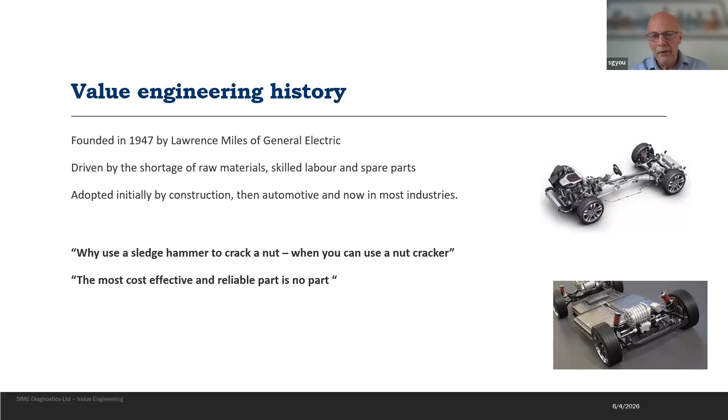It's a very simple assembly. It's very reliable. So this is where the value engineering comes into play.

So why do it in the first place? Most people focus on the cost aspect, your cost of goods and your life cycle cost. And do you know what? It's pretty good for that. If you want to knock out 50 to 80% of your product costs, start this value engineering at day one. I'll show you some examples where we've got significant cost out, but there's a lot more to value analysis and value engineering than just cost out.

So this one here, I was trying to change the exploration into something beginning with N, but I couldn't think of anything. And I could have had a nice instead of ice.

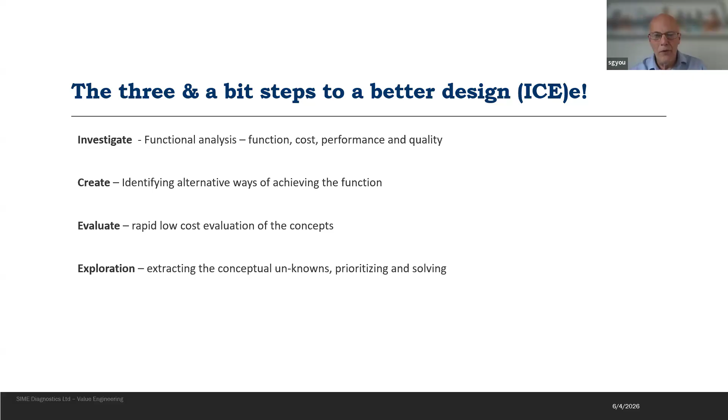Once we've gone through the functional requirements - let's talk about functional requirement - we're then in a stage where we can innovate brand new concepts based on function, not on what it currently does. A good example of that, if I jump forward a couple of slides...

If we look at a conventional way of setting requirements, we might say, right, we've got this mouse. It's the same as in cars - we've got this engine, we need more performance, we need better emissions. But that's almost driving a solution before you even get to the point of asking, what is it that you're trying to achieve?

What is the function that you're trying to achieve? You say, well, actually, in this particular case, what I'm looking for is on a screen, I need to move something or select something. Well, that opens up lots of opportunities. If you think about modern voice recognition, for example, or touch screens.

Let's go back to the voice recognition. If you can load in an app for voice recognition, effectively it is the license cost of that piece of software. There's no hardware anymore, so you can get rid of the hardware. There's nothing to go wrong in that respect. You can select things, you can move things around, and it's relatively no cost. So you've saved all of that unit cost.

A function map for a slightly more complex item - this is a costed function map that I've done in the past. This is for a water system on a radiotherapy machine. What's really interesting is this doesn't take more than a couple of hours, but the opportunity that comes out of this is significant. It tells you about the overall design from the perspective of the top level function.

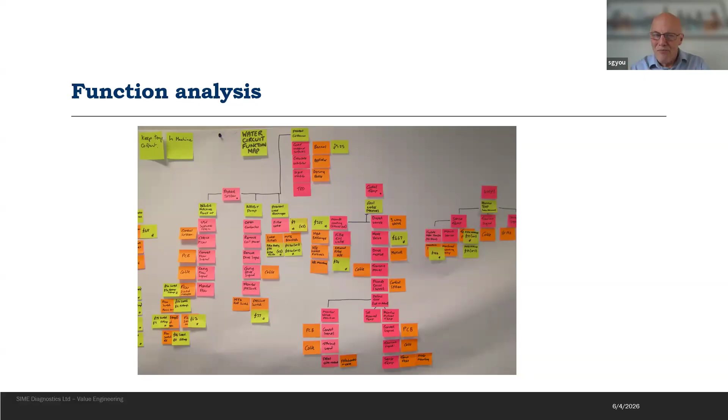And that is the key thing. It says it's control beamline temperature, but it had no mechanism of control. It was open loop, so that had failed. So you're paying all this money for something that didn't achieve its end result. That's really quite an interesting thing about it.

So from some of the examples, the first one is an IVD device, and they were really looking for some money coming out of it. The design house that had been working on it said it's very difficult, we've always considered cost down in our design, we're not going to get anything out of it. The reality is, once we'd gone through the methodology of value engineering and got back to function, the actual design team that had said it's not possible came up with a 26% cost reduction in that product from a one day event. That's significant, that's a massive amount of money in this. In this type of device you're looking at one that was around 60 to 70,000 coming down to around 40 in one day. I think that's good value for money in terms of investment in a tool or a methodology.

The second one is a radiotherapy machine and its water system. In that particular case, what it did was far more than the cost reduction. It got a 42% cost reduction because we had that target we had to achieve. But more than that, it achieved the primary function, and that meant other problems that system had seen for many, many years went away. The instability in the beam performance was affected by that activity.

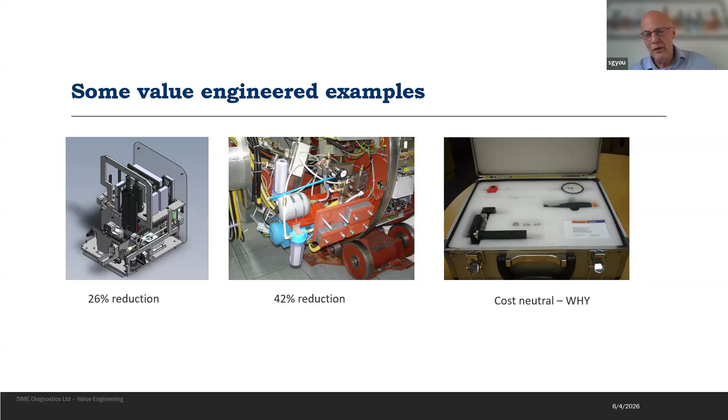So they haven't been painted into a corner. Typically requirements paint you into a corner, saying well this is how it currently works, and we're just going to refine it. It's a refinement. In that mouse example, it was all about, oh, make the mouse smoother, make it look nicer, but it's still a mouse, you're still going to end up with a mouse. Whereas if you go all the way back and say what is it the customer really values, you can change your whole perspective to something that will cost you nothing. So you can cost something or cost nothing.

If you're doing risk analysis, that's key in aerospace, medical devices, military - your DFMEA, PFMEA, and hazard analysis are all linked to loss of function. So it immediately eases that burden as well. Requirements capture becomes easier, the structuring of your systems level architecture becomes easier. So there's so much more to this tool than just getting some cost out. Don't get me wrong, it's great for doing that.

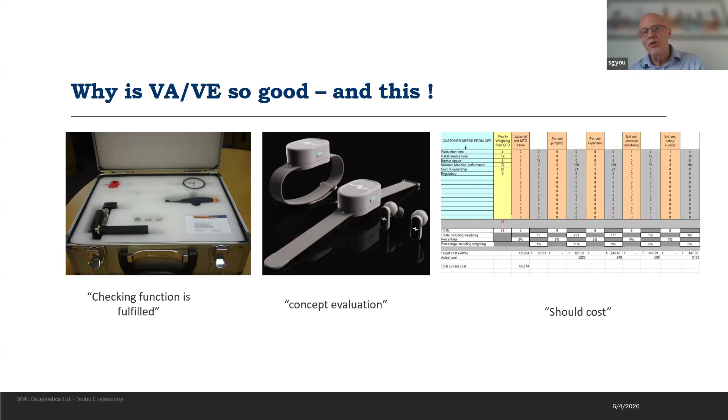Along with this whole tool set, you also have your low cost evaluation. It sits hand in hand with value engineering. So you test out your functional kit with low cost, and here we've got lots of cardboard examples, which again shows speed of development. Everything I've told you about today is very rapid - getting you to an endpoint is a very rapid thing.

This is why it sits in the lean product development folder nicely, because lean is about delivering something of high quality fast, not with more effort. I love this left-hand example - a whole luggage scanner made out of wood, a brilliant example of testing something before you go and commit to it. It was achieving a set function, and they made the rapid prototype to reflect their thoughts in delivering that function. If I could have done, I would have persuaded them to keep the wooden model.

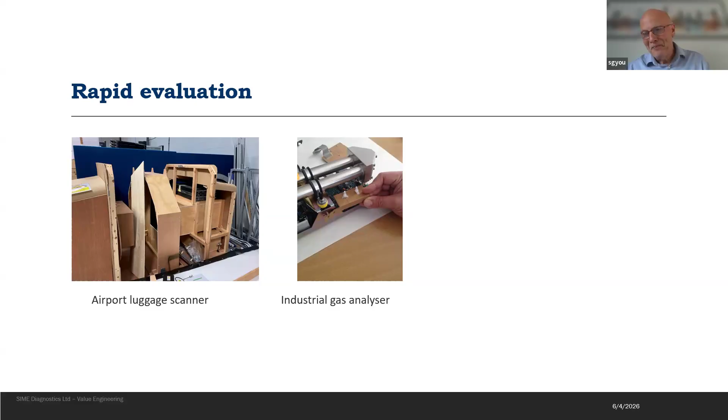I will jump back in a second to one of the slides that gives the methodology in a very simple way, but I want to go to my leaving thoughts before I jump back. I know it's a bit of a strange way of doing things, but that's kind of how I work.

The one thing I can honestly say is that in every company I've been in, from the point I was shown this, I've used functional analysis and value engineering, and I have never ever regretted it. So that's number one. And the companies I've used it with haven't regretted it either.

Focusing on this function changes the whole dynamics of the design. It reduces the level of risk that you carry. It enhances customer value - so there's another lean methodology ticked off. It significantly helps with risk management because you've already got the function map that rolls straight into your DFMEA, PFMEA, and hazard analysis, reducing your burden on other stuff you'd need to do. Fault finding and knowledge transfer becomes easy as well, because you've got a function map that describes how something works in very easy terms.

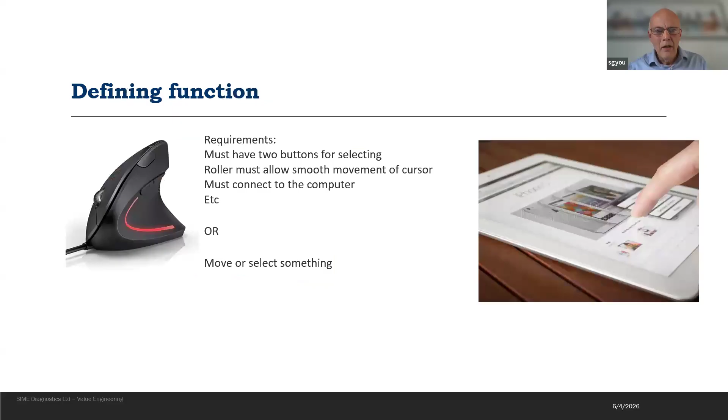So I'm going to jump back a couple of slides if that's okay, and then I'll take a few questions. The one I wanted to focus on is this one.

So I jumped all around and didn't really describe functional analysis in its core terminology. Really, it's talking about what the customer is willing to pay for. So if you were going out and saying, I want to buy a new watch, for example, what is it they're actually buying? Is it the watch, or is it the ability to tell time, or to look aesthetically pleasing?

That's kind of what and how you achieve that - it could actually be if it can tell the time, and it's a speaking watch, and it looks nice, I'm happy with that. So you don't need the display anymore, you don't need the fancy housing. For different users, it's different things, but it's bringing it back down to what is it that the customer's really asking, and it's not those detailed requirements.

So a function, if you look at this, it's broken down into a noun and a verb, and that can only be a maximum of four words, and that brings the teams together to really focus on what they really need, because someone could end up writing a requirement. So in this particular case, a primary function might be for a car to transport people.

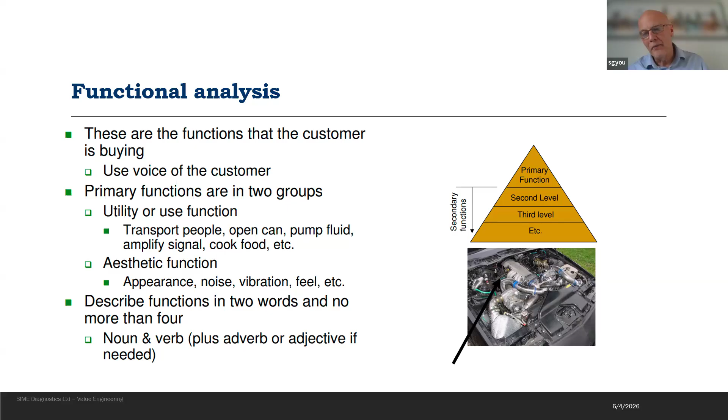And that's kind of where I wrap up, and that's why my end slide basically says: give it a go. What have you got to lose? So that's me, I'm open to any questions.

Colleen, I see your hand up straight away. Yeah, fantastic presentation. I have to say, the simple aesthetic of your presentation really translates into just how deeply you have gone into the subject matter, and have really removed a lot of the noise from your messaging. Standout presentation, thank you.

My question for you is, I'm a big advocate for quality function deployment and FMEA, which can often be so complex and intimidating. I'm wondering about another intimidating part of this, called TRIZ, and the technical contradiction that is sometimes used in these groups. I'm just wondering if you've had any involvement with that methodology and whether you've found it helpful or not. And I don't know how to lower my hand, so sorry.

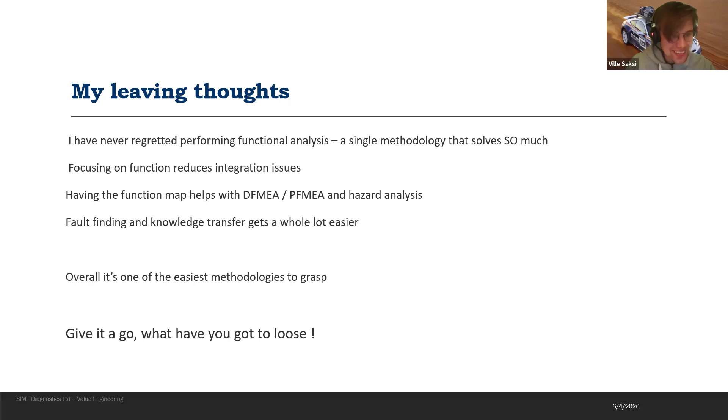But these sort of things, I think the books kind of describe all of this. I don't know if you've seen the Haynes manuals for cars, but I wrote the books based on the Haynes manuals. It will never make you an expert, but it will get you through, from departmental management right the way through to full business transformation.

So, is there any other questions, or should we move on? Oh yes. So how do you say your name? Steve. Oh, Steve, okay, I'm looking at your name on the thing. Sorry Steve, I came in late, so I apologize for that, I'm very sorry.

But I can relate to your functional breakdown. I used to facilitate building those for diapers, which are quite complex - personal care diapers for babies, fem care products, adult care products, and all sorts of things. But I had a question.

When you build them, how far down do you go? Because we used to go all the way down, from a system standpoint, all the way down to raw material and even down to centerline settings in the process. I was just curious, when you build those, do you ever go that far down, to component level? But it's interesting.

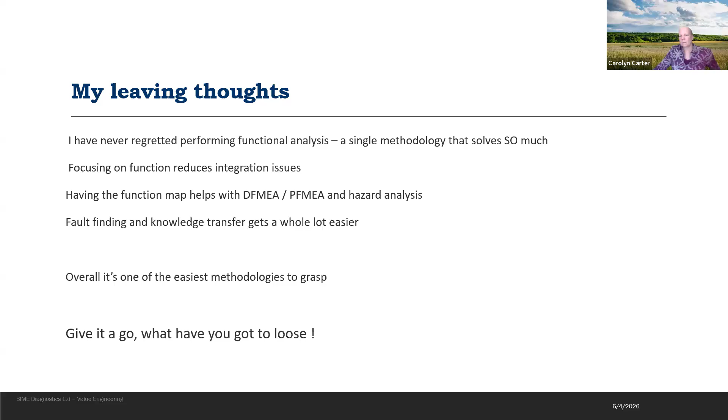A lot of your clients would want you to deliver something that's delivering the customer value in the simplest form at the best cost. What you could demonstrate to them is, here it is. And you can come up with something unexpected. That's the thing I love about it, is it changes the paradigm of engineering.

And it's one of those things, Nick, with yourselves and your great team, it's the sort of thing I would love to just come and do for nothing, give you the run through. It's just because it's that great. Yeah, no, I'm sure we'd be interested to have that, to be on the receiving end. Well, thank you. The offer's there, but thank you, Nick. Thank you. Cool. So Colleen has gotten tired of the chat, so wants to talk.

Come on, Stephen, what is your preferred method in terms of a remote environment? Probably not your preference, being very hands-on with that function map, but have you ever done this type of work in a remote environment? Yeah, and what is your preference?

My preference, this will come as no surprise, is I use one of the free tools that allows you to move post-its around online, because what I don't want is the reduction in flow of ideas. If you've got someone sitting there typing stuff in, it doesn't work. So I use one of the free tools, I can't even remember what it's called now. But like you say, my preference is to be face to face and just do it. If I search up a free tool that will allow me to move post-its, and I get everybody to move the post-its, write their own post-its, drop them in, people get more out of that experience because it's learned by doing. And that's my whole methodology. Don't teach people something they're not going to use tomorrow.

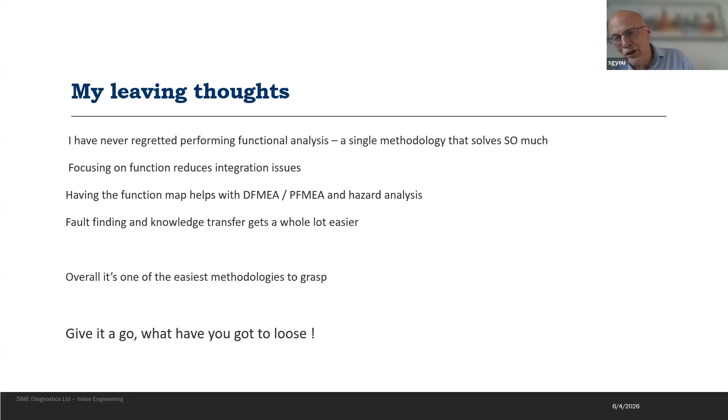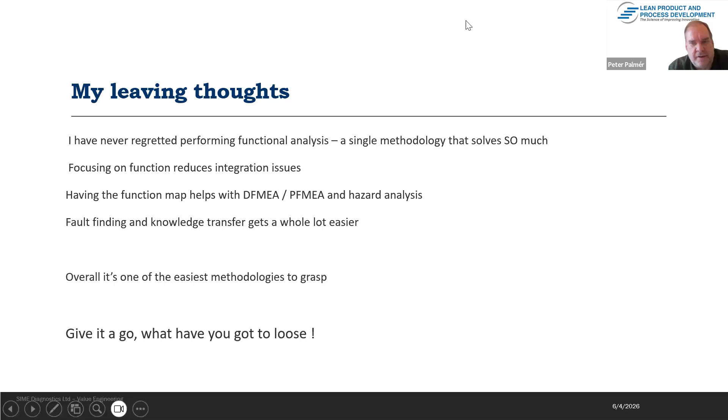So I know Miro board, yeah, that's one that I've used, that's pretty good, that's pretty good. Okay, thank you, thank you. I should quit off this and allow other people to speak, shouldn't I? Well, thank you Stephen, very good presentation. I'll stop, and let's stop the recording.